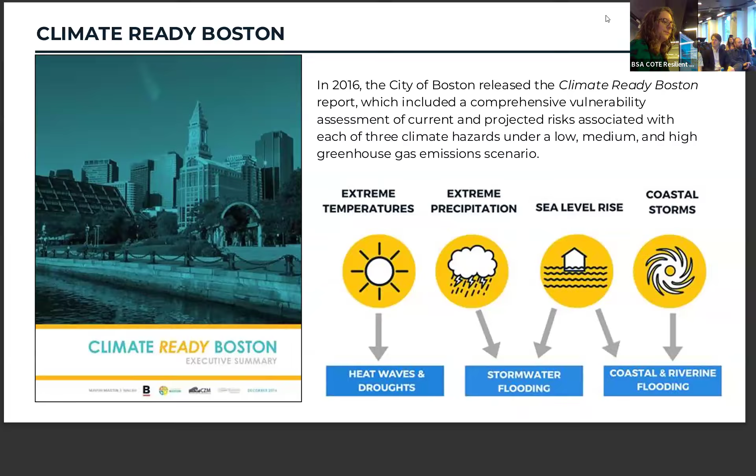This was a comprehensive vulnerability and risk assessment looking at the hazards that our city is most likely to face in the future, being heat, stormwater flooding, and coastal flooding. And my focus today and in general is on the coastal flooding piece. So as we know, we are a coastal city. Over the last 10 years, we've seen more and more nor'easter storms that have hit and caused flooding, also sunny day flooding in king tides. And we know that climate change is only going to exacerbate these areas.

So in the last decade, there have been many, many different resilience planning and policy pieces that the city has worked towards making, and the CFROD is just one of those pieces. But over a 5-year span, the city wrote a comprehensive neighborhood resilience plan for every neighborhood in the 47 miles of coastline. So we have the ideas for our district scale solutions and which flood pathways need to be addressed.

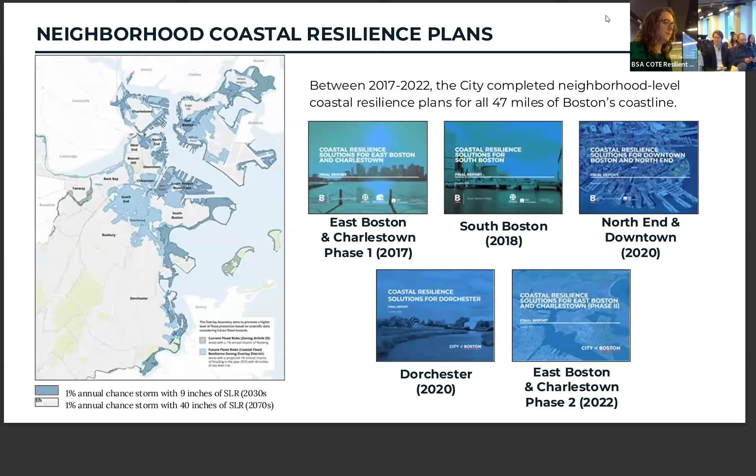And what I'm focusing in on are the adapted building strategies. Because of those neighborhood plans, hopefully these buildings aren't going to see water. But for right now, until we have the billions to build these strategies and the full district scale solution across our 47 miles of coastline, adapted buildings need to be addressed.

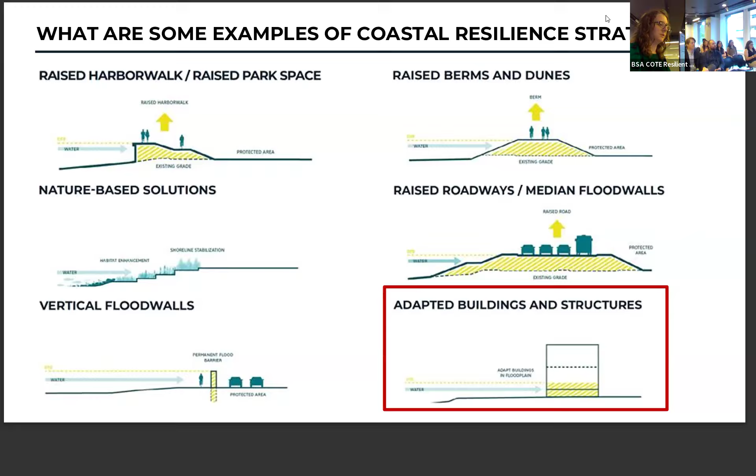And in each of those neighborhoods, we are looking at many, many different ways of providing resilience. We have lots of different options, and it's not always the best fit one scenario for everything. So, looking at raised harbor walks, nature-based solutions, flood walls where we have to, but also doing that belt and suspenders approach of adapting the buildings and structures.

And the 2 pieces to address those building and structures that came out of Climate Ready Boston are zoning to protect our life safety and property, and to create specific resilient definitions within our zoning code, and also a guidelines document to go hand in hand to advise on how buildings in the context of Boston can be made resilient. And I'm going to go through each of those pieces. Excuse me, there we go.

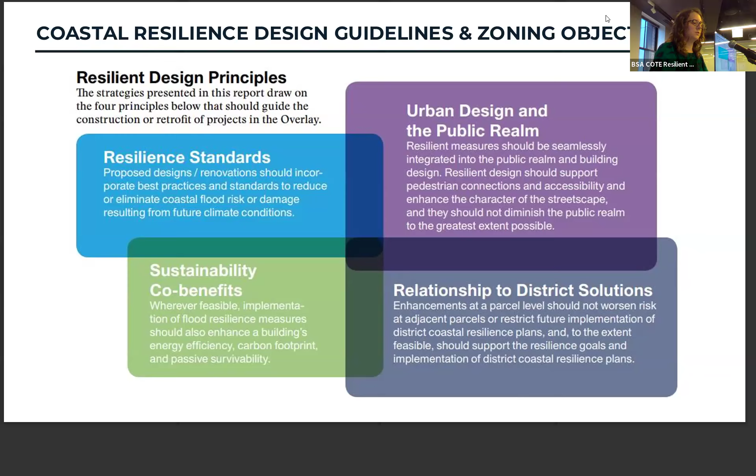And resilience review that came out of the zoning is looking at these 4 pieces hand in hand. We're looking at both the resilience standards in the architecture, sustainability co-benefits, and how to integrate that seamlessly into the public realm. We are changing the shape of the city. Our streetscapes are changing. So how do we talk about design in a meaningful and thoughtful way with all of these pieces? And how can they relate to district scale solutions? Not just looking at a parcel by parcel basis, but where we can tying all of those individual pieces together.

So first I'm going to go into the Coastal Flood Resilience Design Guidelines. So this is a design guideline document that looks at the specific building typologies here in the city at all scales. So from residential to our large commercial buildings. The guidelines document looked at case studies for both new construction and retrofits at each of those scales.

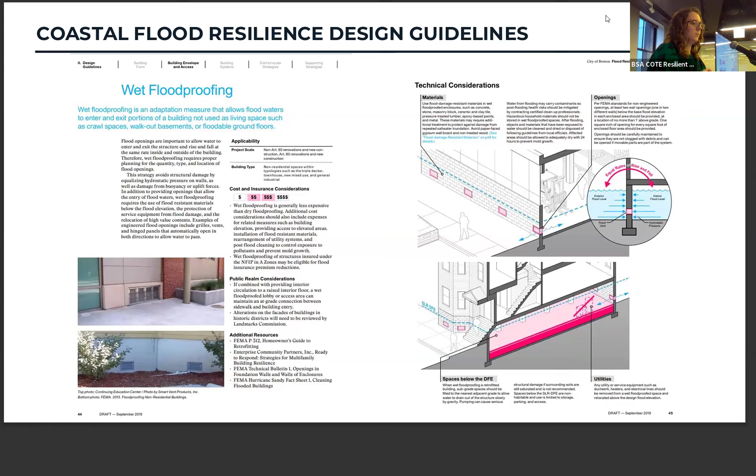And there are many different levels of design that the guidelines talks about. Building forms, building envelope, building systems, and it goes into each strategy that falls under those, looking at the cost considerations, resources, and technical considerations for each one. And there are also case studies of those building typologies that we mentioned. So how to retrofit at each scale to provide resilience and also best guidance for building new.

And there are many different things that you have to start thinking about in your architecture that are outlined in this, like how your circulation changes. When you have design flood elevations that are suddenly 5 feet above your sidewalk, how can you thoughtfully design your circulation? Where should you put it? And this gets you thinking about different ways to do that at each scale.

And then once your building is raised, what do you put under it? Do you do tuck-in parking? Do you elevate and wet flood-proof below, or elevate on fill? So the guidelines document is great in talking through kind of each of those pieces to start thinking about. And those outline the resilient practices that we review in our zoning.

So our zoning is called Article 25A, the Coastal Flood Resilience Overlay District. It's not the most beautiful acronym, but we call it the CFROD. So it's what we got though.

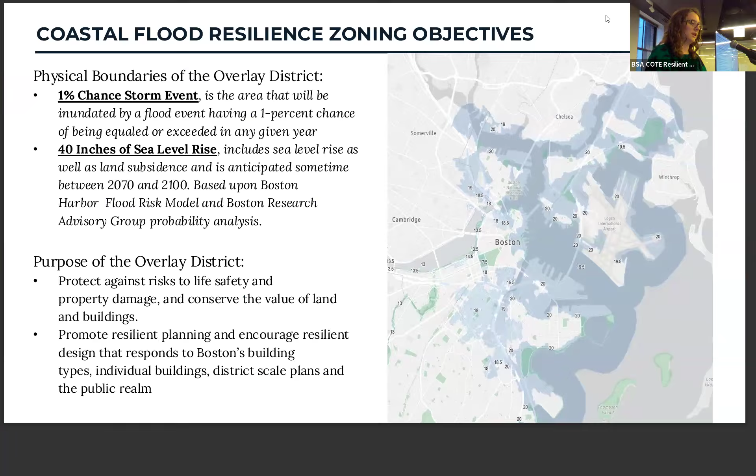The CFROD boundary is a 1% chance storm in 2070 with 40 inches of sea level rise. And that level was kind of a mid-case scenario emission standard as decided by the Boston Research Advisory Group. And it's based off of the Boston Harbor flood risk model. So what we're trying to do here is we're trying to protect against risk to life safety and property damage and promote resilient planning and design.

Every parcel within the city has its own base flood elevation. These are outlined in Boston's zoning maps. You can click parcel by parcel and get the elevation in Boston City Base of your base flood elevation and the level that has to be protected up to. And these heights range anywhere from 13 along the Charles up to 20.5 downtown in East Boston.

But once you start to add in the projected sea level rise, as well as future storm scenarios, you can see exactly how much further into the city this blue that represents the CFROD goes in. So there are many areas that aren't protected by required building code that we require resilience for through our zoning code here.

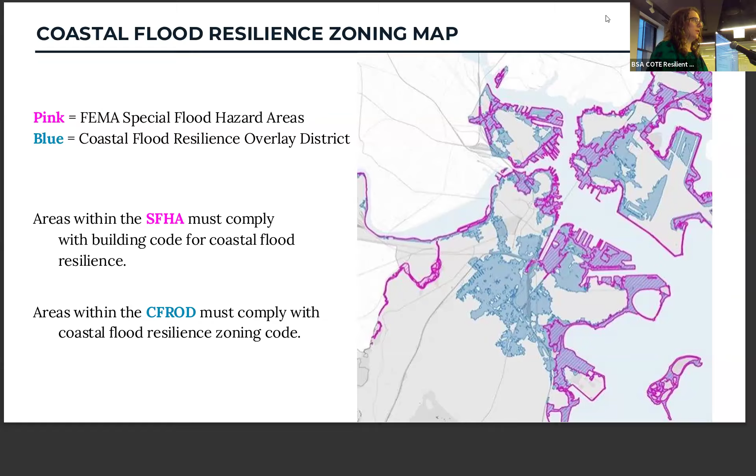What projects have to comply with this? Generally projects 20,000 square feet and up. So that falls within the city's Article 80 bucket. And smaller projects can also elect to comply. But the biggest thing that the zoning outlines is what that design flood elevation is going to be for each parcel. So the design flood elevations are base flood elevation plus freeboard, which is an element of safety.

We don't have a crystal ball. The maps are the best we have, the best science we have, but we still don't know what's going to happen. So we require that element of safety. And that changes based on your project use. So 2 feet is required if you're a residential use or in a FEMA V zone or a high risk structure, but everything else still requires 1 foot above that mapped base flood elevation.

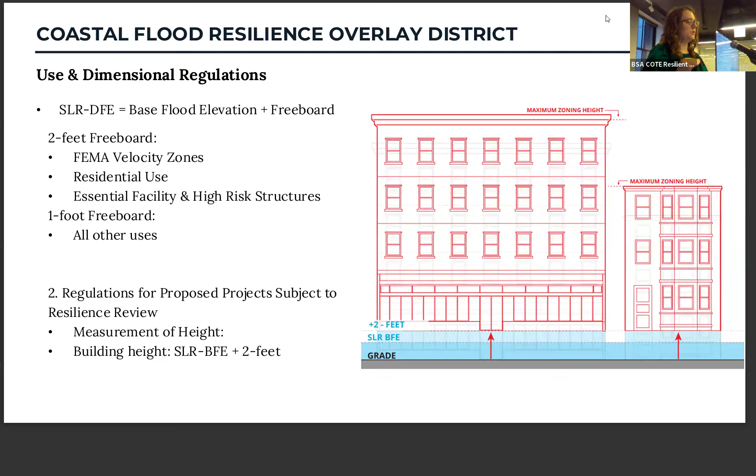And this also changes the zoning height of buildings in this overlay. So your zoning height is now measured from 2 feet above that base flood elevation. And as for residential uses, the design flood elevation for most uses is your protection height. That's the level that you have to provide resilience up to, but residential uses do have to be raised for life safety. So in your residential buildings, you can have parking, access, and storage below, but all residential uses or ancillary residential uses are raised in this area.

So implementation, what does this look like in practice? There we go. The zoning was adopted in 2021, so almost 5 years. We have had projects come through, and so far over 400 projects have been reviewed. We have permitted almost 3.5 million square feet, and construction has been completed on about 250,000 square feet of projects. These metrics are tracked in the new Climate Action Plan implementation dashboard, which tracks a bunch of resilience and sustainable efforts that are going on in the city. So it's fun to see that number go up.

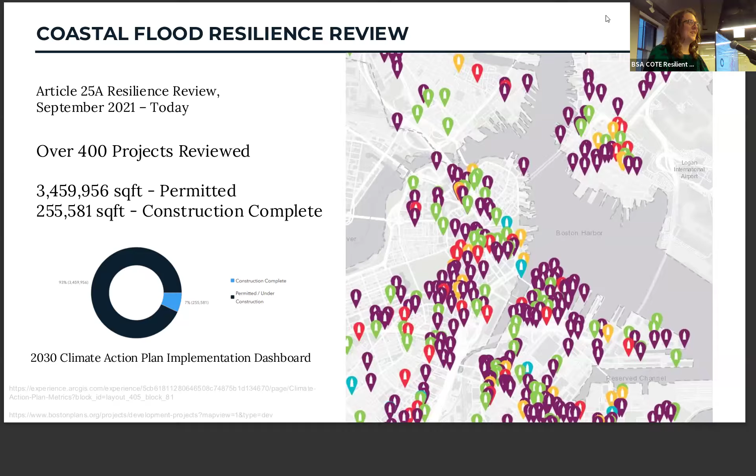We have many waterfront master plans going on in the city right now, and we've seen some very thoughtful ways to have a continuous line of protection up at that DFE all the way across the site. 425 Medford has that continuous line of protection, and they're also committed to raising all buildings above the design flood elevation for that belt and suspenders approach.

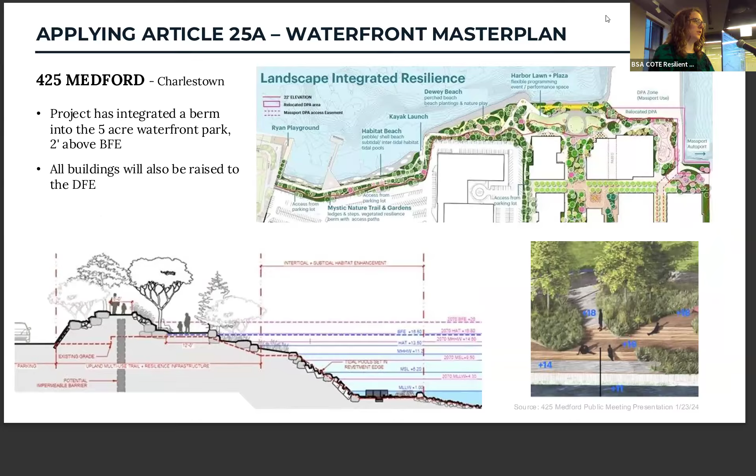Once we get into some mixed-use buildings, we are seeing our public realm and our streetscape change. Normally, these are retail spaces that would be at grade, but they're being raised for resilience. So how do you have zero lot line projects that are raising? How do you still have a nice streetscape, buffer those edges? And what's the best design outcome?

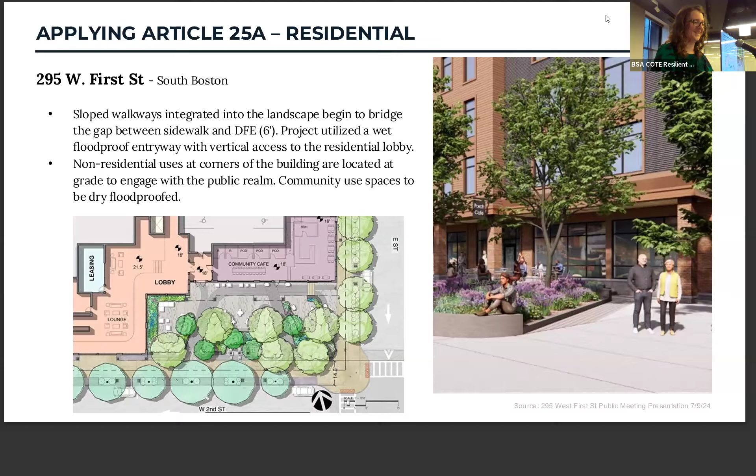And in some areas of the city, the DFE can be higher than 6 feet. So we are seeing residential that create sacrificial ground floors. All of the residential uses are raised. They're measuring that height from almost a floor up, and the ground floor becomes sacrificial parking, access, and storage in order to keep those residents high and dry.

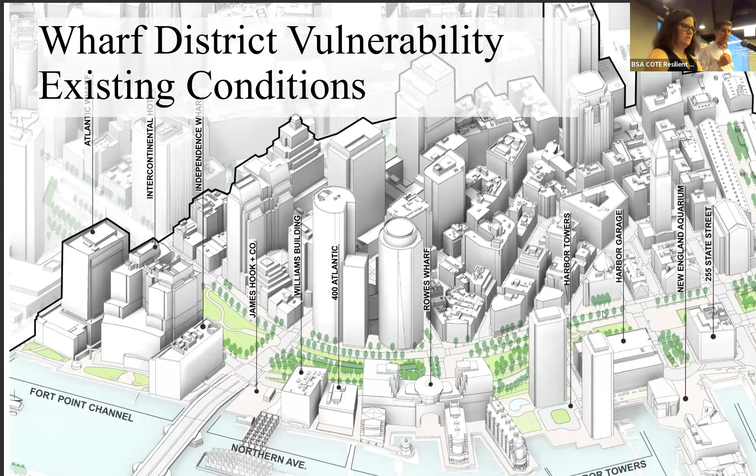This is nice. Yeah, we're kind of zoomed in here. I'm just wondering if we can zoom out a little bit there, but generally, if that's not working, we can, yeah, there we go. Perfect. Well, yeah, it's kind of zoomed in a little. That's interesting. Technical difficulties. Sorry, I just zoom fit screen. So enter PDF full screen. Sorry, I don't know why. I think that's going to be fine. Is that okay? I apologize. That's fine. Nah, we're good. We're good. We have to be resilient in all things.

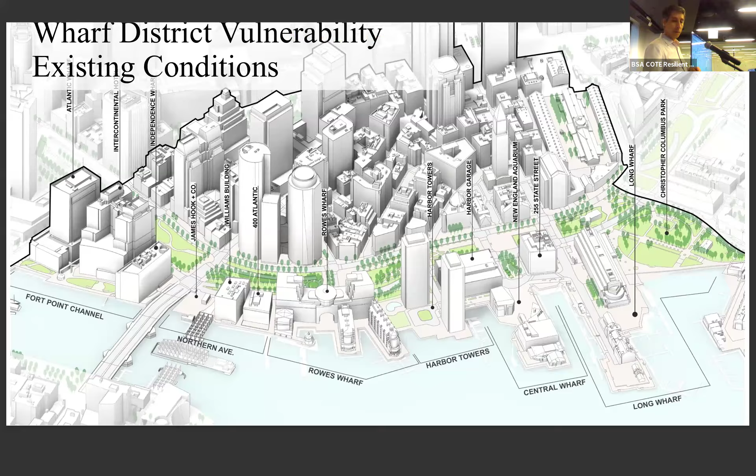So this is the Wharf District. It extends from the Fort Point Channel over at the left side of the screen all the way over to Christopher Columbus Park at the right side, all along the waterfront of downtown Boston. That's what it looks like today. And what we are trying to help the community protect against is this. This is a 100-year flood, not in 2070, like we often like to talk about, but in 2030. So if you remember Winter Storm Grayson from 2018 that flooded out MBTA's Aquarium Station, flooded up State Street, that's that storm happening in 2030.

Similar for the North End. So here we're now just moving just north. On the previous map, we've got Christopher Columbus Park over there on the right side of the screen, all the way up to Battery and Burroughs over by the U.S. Coast Guard. Similar flood hazards here with that same 2030 100-year storm.

So we've been working with both these communities, working with the Wharf District Council in the Wharf District, working with the North End Waterfront Climate Alliance in the North End. Both are nonprofit organizations who are working to help improve the quality of life in their community. So these are volunteers who are just trying to do their best for their community and have been for quite some time. So they came together and said, look, we want to have a community-led resiliency plan to help give our residents, our business owners, the people who work, live, and play here a voice in what climate resilience means to them as a community.

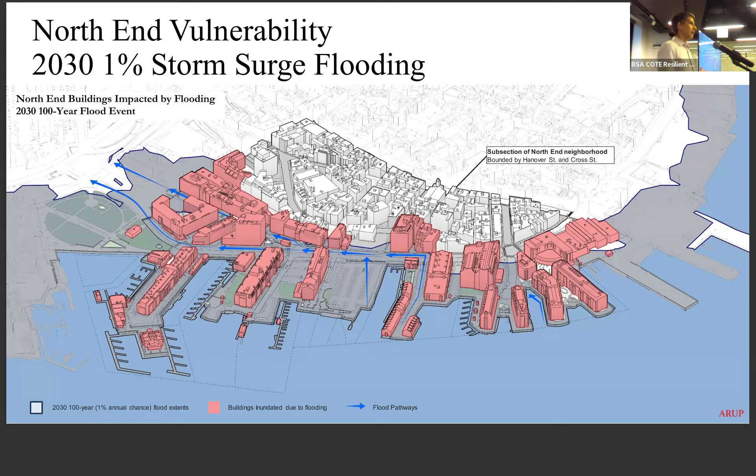So I'm not going to go into a whole lot of detail on what the plans are, because I really want to get into how we've used some of the tools that Amber talked about, how those were really important for us as designers to be aware of and to integrate. I want to talk about the stakeholder engagement framework that we use to build unanimous consensus with property owners on these projects, and some of the lessons learned.

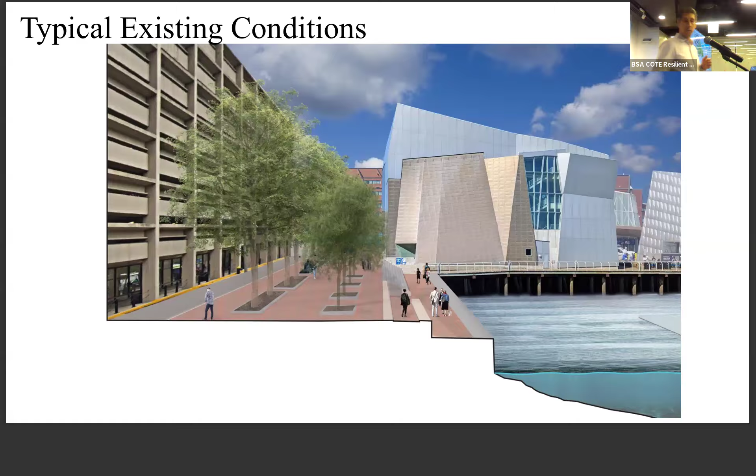So today, we come along to the water and we step down on the harbor walk to get close to the water. And what we're proposing to do with our plans is flip that, so we will step up in the future to come up over this elevated landform that has a flood wall buried in it. What we're trying to avoid is a 6-foot tall wall that cuts off access to the waterfront, destroys what we know and love about the waterfront, providing an accessible walkway up and over the top and back down again, new seating and steps down to the water, and using this as an opportunity to incorporate the living shoreline you see there, as well as additional vegetation to really make this a world-class waterfront and not just a flood wall. So that's generally what we're looking to do throughout these areas.

So with that, touching on the tools that we use to get there, because at the end of the day, we were successful in building support with 100% of the waterfront property owners, public and private, in both neighborhoods, as well as building support with the city and the Army Corps. So how we got there was the great work that the city has already done to lay the groundwork here and facilitate communities to come and take this next step.

So I'm not going to go into great detail because Amber did a great job, but some of the things that we found really useful in Climate Ready Boston, there was great documentation of the public engagement that the city had worked on for years to identify the priorities, preferences, and the criteria the community had voiced and said, these are the things that we want people to consider when we choose between options for resiliency. So having that documented was fantastic so that we could build on that rather than have more meetings and burn people out with meetings and meetings.

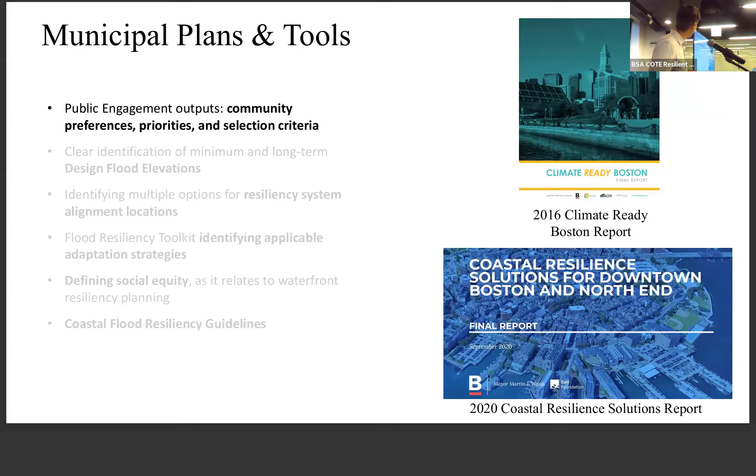Those are two different elevations, just so you don't get confused. Climate Ready Boston is more about the neighborhood scale, which is what we were really using for North End and Wharf District, but we're also working with buildings that need a second line of protection, and that's the zoning viewer. But having those elevations saved, I can't tell you how much time and effort as we're working with communities to establish what needs to happen to protect them. Identifying the locations where flood protection systems could be placed was immensely valuable as a first pass with Climate Ready Boston.

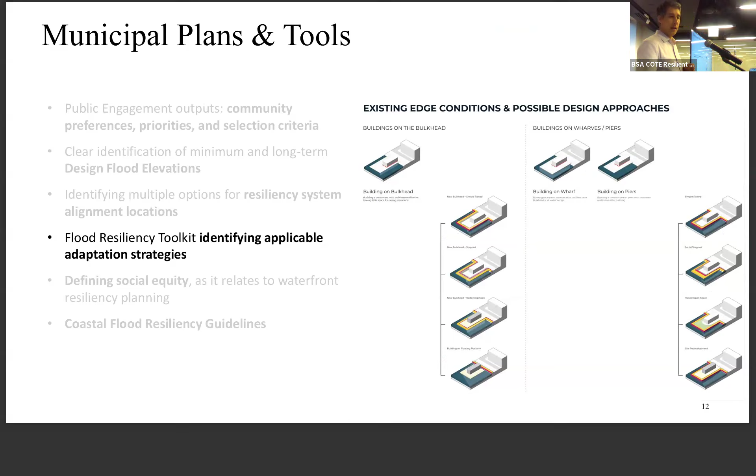Preparing a series of toolkits. This one I think was from downtown and North End with different strategies for flood protection that could be applied to those alignment locations. Already having those vetted by the city as what was appropriate for these locations was really helpful.

Of course, there's a lot of conversation and engagement that comes into this, but the infrastructure really plays into equitable access to the waterfront, making sure that we've got safe transportation to, through, and around our neighborhoods, and providing ecosystem health within our plans. So that was really helpful to build consensus around what we were trying to achieve in our work.

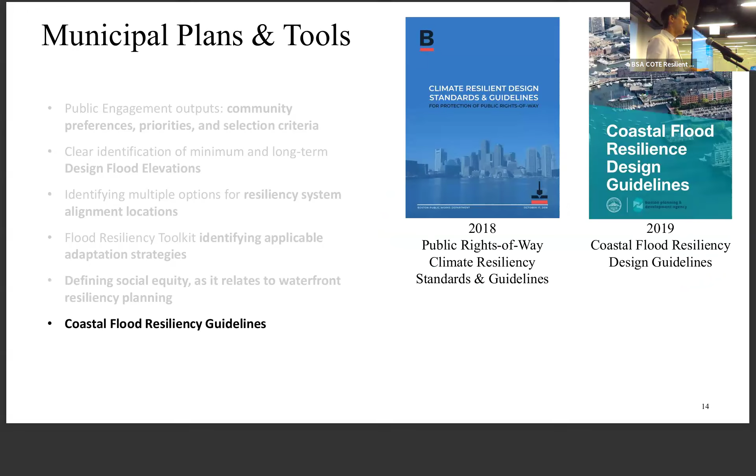And then finally, of course, the various flood resiliency guidelines the city has put out to make sure that we're providing the same level of protection in the same ways throughout the city. So fantastic tools. Could not have done the work that we did without the city of Boston laying the groundwork for this.

Now, I'm going to change gears a little bit here and talk about the framework that we use to set up these projects and deliver them. This stakeholder group, this public-private partnership, was put together by the Wharf District Council. The Wharf District Council had been around for a while as a group of residents and business owners. They wanted to really start building a coalition of support from day one, because they always knew that they don't have the money or the people or the will, quite honestly, to take the design to 100% and build it, nor do they have the authority to do so. So this was one step in the process. So really crucial was building a coalition of support to take it on to the next step.

So they formed in partnership with public agencies, city departments, state representatives, they brought some private sector consultants in as advisors, and other nonprofit organizations that do represent the interests of various communities and groups within the city, as well as the property owners and marina dock operators. So brought all these folks in as part of the project.

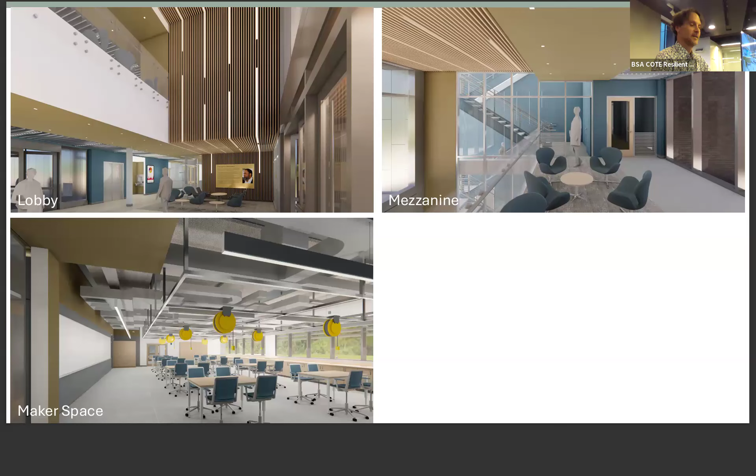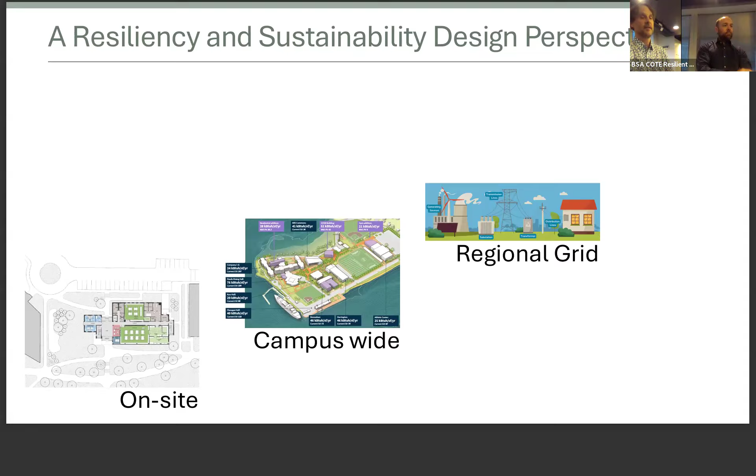So resiliency and sustainability really guided the design from the very beginning. DCAMM and the school were very much committed to making this a showcase building for a low EUI and resiliency. And because they're living on a floodplain, you can appreciate that aspect of it. So for us, we were always looking at it through the lens of the site itself, how the building was going to relate to the entire campus and its viability, understanding the relationship of the building to the overall grid, the local grid, and being able to survive for some time without it. And then consideration for the climate as good stewards through the design and construction process.

So part of the approach to resiliency is pretty fundamental. First of all, you want to design robust because you want it to last. There's no sense in spending lots of money and embodied carbon and energy on stuff that you have to replace. So we really think of it as a 75 to 100-year building. The other thing was to appreciate the freeboard above the floodplain level that was predicted for the 100-year storm in 2070. So we are raising this building slightly beyond the flood level.

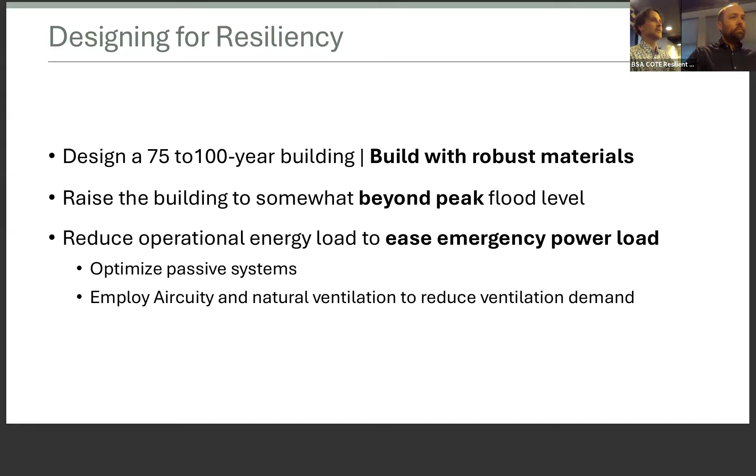The other thing is to be sure that we could run this building for at least 48 hours after a blackout. We wanted to lower the overall energy requirements for the building on a daily basis so that you wouldn't have to have lots of generators running to get you through those 48 hours. So we emphasized passive systems and approaches, particularly for the building envelope. And because this building has a relatively large number of fume hoods compared to its size, we wanted to control the amount of once-through air, so we used Aircuity systems to monitor airflow and reduce it when the hoods aren't in use.

So this is an overview of some of the sustainability and resiliency pieces that went into this building. First of all, we've got a pretty amazing EUI of only 52 kBTU per square foot per year. And in so doing, we're at 45% of the ASHRAE 90.1 2010 standard. This building started getting designed almost 4 years ago, so we were working with older standards. But we also had to adhere to the Massachusetts Executive Order 594, and we managed to be 43% better than that.

So what are some of the things that we did? Well, one of them that we had a huge advantage is the school itself is installing a ground-sourced thermal heat pump system. So we have this campus loop that we are tied into, and actually the primary mechanical equipment that distributes the geotransfer heat is located in this building.

So the other thing we did too is that we actually raised the whole building 6 feet above the lowest level of the site. The site was between 12 and 13 feet, and we're raising it over 6 feet. So that's a pretty significant amount of earth moving that we did. We also obviously are trying to reduce energy usage, and so we have an enthalpy wheel for energy recovery. As I already mentioned, we've got an Aircuity system in it to handle the indoor air circulation. It changes the amount of air delivered based on what it senses within the building.

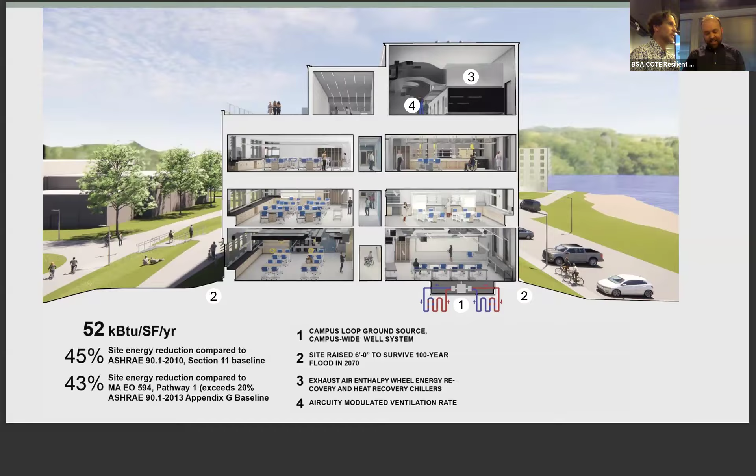So the difference is when the hoods are not being used, the air is moving at 2 air changes per hour, and then when they are being used, it pumps up to 4. And then we also have the domestic hot water that's connected to the geo loop, so we're preheating all the water before it actually has to get heated up to the temperature for hot water.

We were able to get very low U value for our windows, and there's an interesting story on that too that's coming up. And we were able to do similar for our walls, so you'll see a very nice wall section coming up that shows how well insulated we managed to do that. So this is all really important fundamental homework that doesn't show up in a fancy design on the exterior of the building. Yeah, exactly. But is extremely useful to the upcoming information. Yeah, that's the stealthy part of the building.

And then we also were reducing energy costs by doing daylight dimming throughout the building. And also we have a much lower LPD, of only 0.6 watts per square foot instead of the typical 0.99. So what are the design drivers? First it's the executive order from the state, then it's high winds, and it's sea level rise and potential flood conditions, and then being good climate stewards.

So the executive order is basically, almost all of you are familiar with it, a great way to get fossil fuels out of your life. We do actually have a backup boiler in the building for emergency, and we are managing to meet LEED Silver. So before you go on, it's the state making sure that state projects lead the way in sustainability. So since this is a state school, this is a key project to do that.

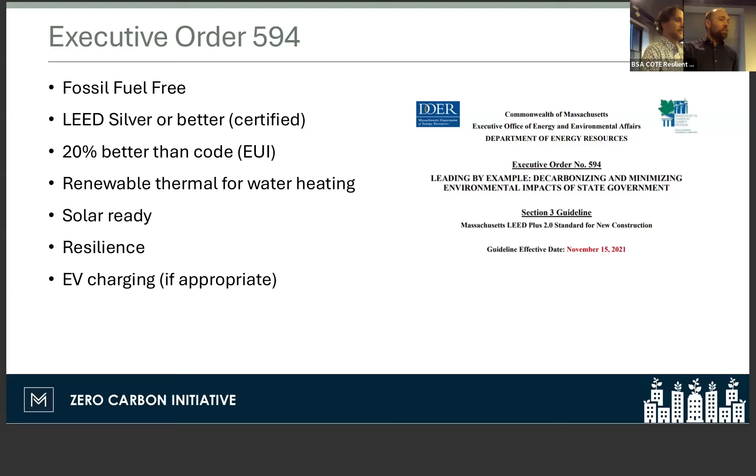Yeah. And at the time, the International Energy Conservation Code for 2021 was our requirement, but DCAMM was really insistent that we should opt for the Mass Stretch Code for 2023. So that is what we designed to, and so it's very high performance building design, and you can see in the highlighted text there the various things that we're doing here. It's not passive house in terms of envelope air tightness, but it's pretty close. It's a lab. And it's all about DOAS systems, enthalpy wheels, and then we were able to get our site energy down too considerably.

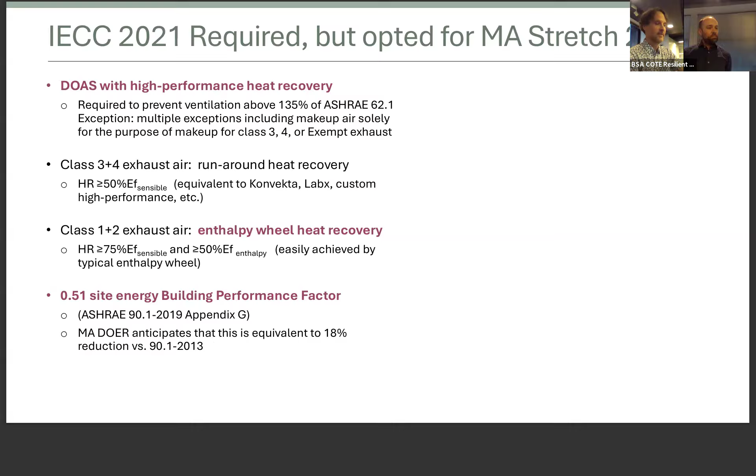So some of the resiliency goals that the school needed to think about at the very beginning was: are we going to do good, better, or best for things like surge and precipitation? How are we going to deal with wind and seismic? And through a whole balancing act of cost and practicality, they opted for the good approach. So what this really has a lot to do with is making sure that we had all of our mechanical and electrical equipment raised up above the floodplain. So we have an electrical room that's at 18 feet and everything else is up in the penthouse. We have good code compliant glazing and obviously we're meeting the seismic code.

It's interesting that what we did was just good. Yeah, on those respects. So wind hazard, let's talk about that.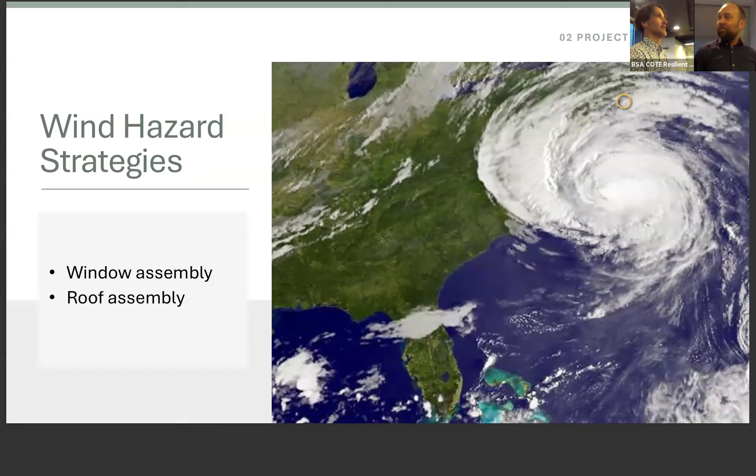So really for us, the windows and the roof assembly, but particularly the windows, were the hot spot. And one of the things about the area right here, and you can see in the yellow circle, the peninsula in Buzzards Bay that the building is located on, was that we actually had a wind speed of 139 miles per hour, so there's a risk category 2 here for hurricanes. And it also would have airborne debris, so there's the issue of missile protection. The wind direction is pretty straightforward. It's generally coming from the west, just like the Earth spins.

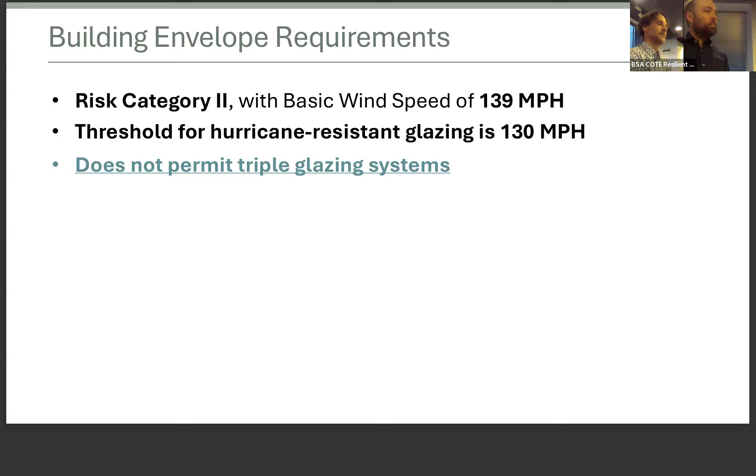So here's the deal. So the building requirements, we have to meet these categories. And the thing that is really depressing is that when you're at 139 miles per hour, you can't use triple glazing. There are not available systems. Yet. And so this was a big disappointment for DCAMM and also for us, because what that meant was that we were going to have to use double glazing.

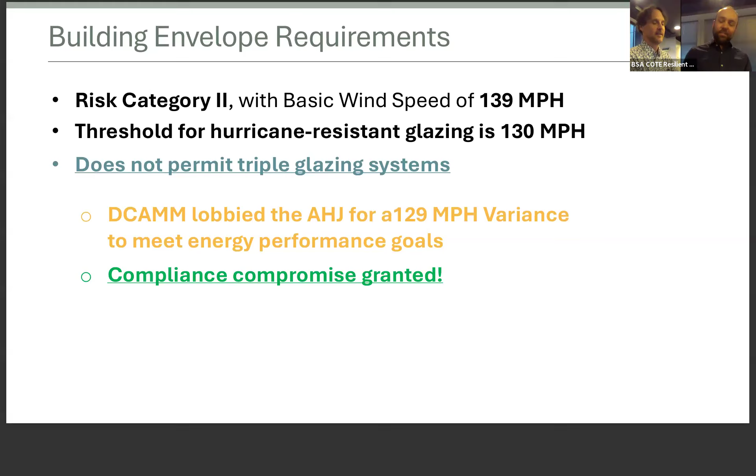And DCAMM basically lobbied the AHJ, and we were able to get him to say, all right, the risk factor is actually going to be 129 miles per hour for this area. And so that means you can use triple glazing. Compliance granted. So energy trumped a little bit of safety factor. And it was right on the edge. It's important to note that. Yeah. So for us, what was exciting is, we're going from a U value of 0.42 to 0.23, and that's an exciting change.

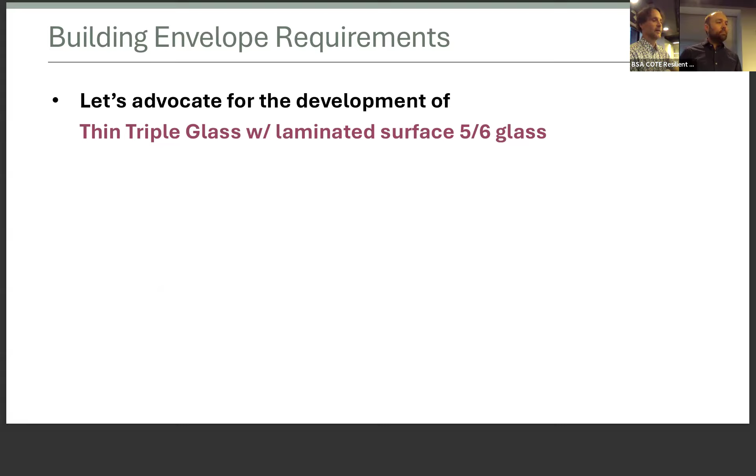That's great, but what would be really nice is for all of us to try and advocate the window companies to work on a triple glazed window system that would work and have a laminated glass at the 5/6 glass. So there is stuff happening though, because there is now thin glass triple glazing that's starting to happen. They can fit into a 1 1/4 inch wide mullion pocket. So we think that this might end up being something that will become reality, and all of us can work hard to convince various glass manufacturers to move in this direction.

So this isn't just academic. We're doing another project at the University of Rhode Island right now that is suffering from this exact same thing. And there we actually ended up having to go from the triple glaze down to double glazed. It has a little bit higher wind speed.

So the other thing we were doing too is making sure we've got a roof assembly that's not going to blow off. And what's important here actually is the lower detail that you're seeing there is just making the point that the first layer of insulation, which is not tapered, needs to be glued and mechanically fastened, and that it's only the tapered portion that gets adhered with mastic.

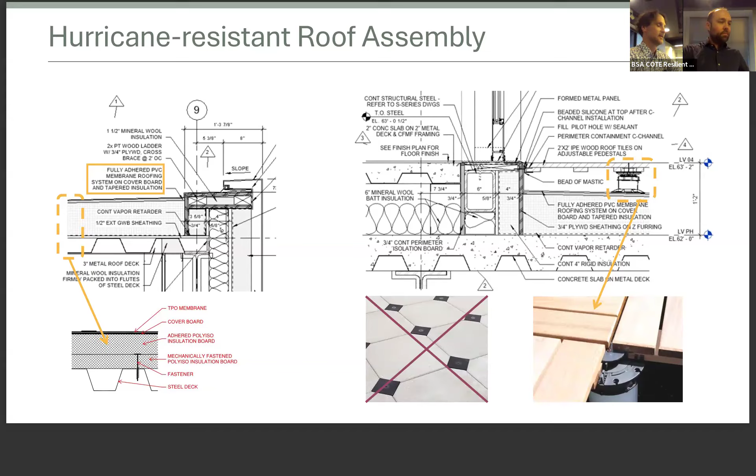And then the other part that was important is there's a walkout deck now. And for a while, they thought they were going to use concrete pavers, but you probably know that these bison systems have a plate that goes on top of the corners of the paving to hold them down for hurricane winds. And they found that extremely unsightly and horrible. So what we ended up going with instead is Ipe decking, and those have a kerf cut below the decking that prevents the hurricane uplift. So we went from what's on the left to what's on the right.

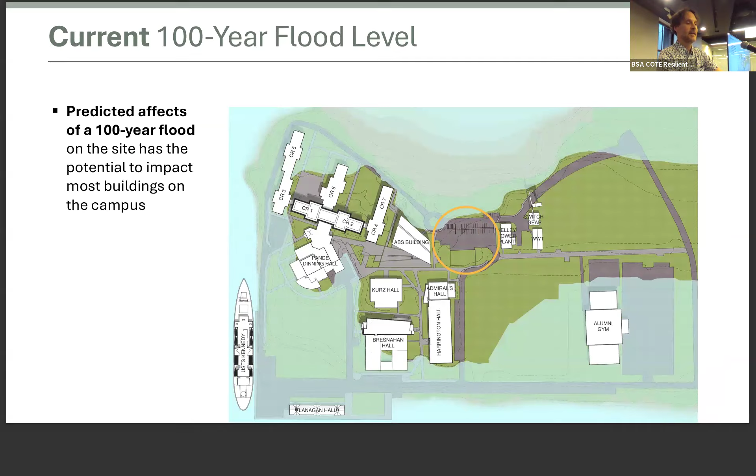Okay, so let's talk about sea level rise. Obviously you guys are aware of the fact that we're in a big flood zone, and so is our site. And the closer you get to it, you can see the projected sea level rise here, but what sucks is when you get a 100-year storm and the flood level for today. And then what happens in 2070? Well, it's a lot worse. In fact, there's only one little piece of high ground left on the entire site. And our building, if it were not raised, would definitely be inundated.

So before we actually got this job, Sasaki did a masterful job on an overall campus master plan and a site proposal for this particular building. And at the time, they were recommending what was going to turn into a 5'6" freeboard, but it was to raise the building to 17'6".

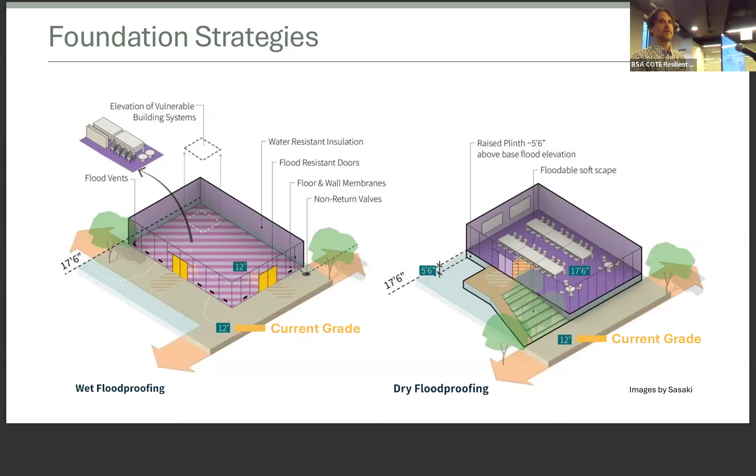So what this slide is basically showing is, do you just sort of do wet flood proofing, or do you do dry flood proofing? The school was definitely adamant they wanted to do dry, and so when we chose to do that, they were also more conservative about how high they wanted the building, how much freeboard they wanted. So we elected to go up 6 feet instead of 5'6", and so now the building's first floor is at 18 feet. And one of the crucial things was making sure that the electrical systems, which is that yellow segment there, are all at 18. Even higher. Yep.

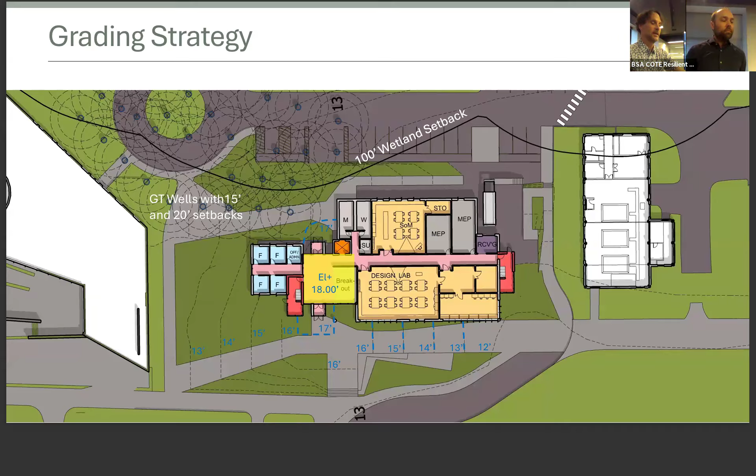And so what you can see here is how we had to regrade it. And a lot of the challenge to go up 6 feet on the west side versus 5 feet on the east is that we also needed to make this fully accessible, and we didn't want any ramps. We wanted nothing more than a 1 in 20 slope. And our landscape architects, Traverse Landscape, did a terrific job with that.

So let's just give you a little campus context. So the buildings on campus right now are all of these you see, and I realize we have to move really fast. Yes. All of them basically are 13 feet above sea level, and right now, the base flood elevation ranges from 10 to 15 feet, so almost all these buildings get inundated. And for the 2070, it's way worse, from 13 to 17 feet.

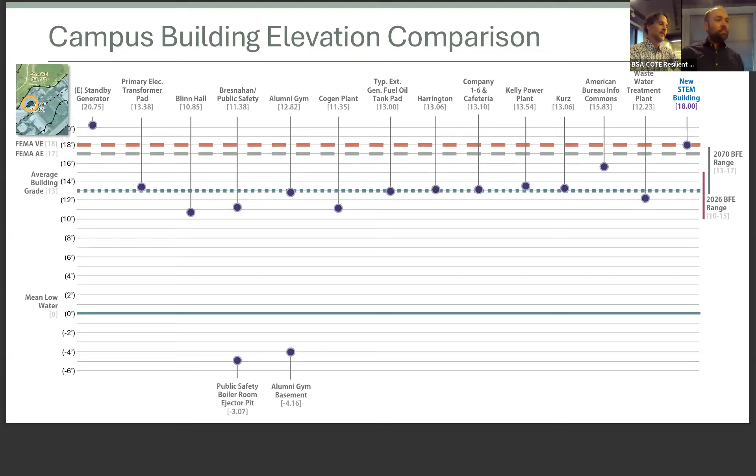The school definitely elected to design for the 17-foot level. And by the way, the FEMA flood level, the AE flood level, is at 17. So we built a building at 18 feet above there. But they'll be struggling with what to do with the rest of the buildings over the next quite a few years to raise them up or retrofit them or whatever. Luckily, the high velocity zone is further north away from the site, so we don't have to worry about that.

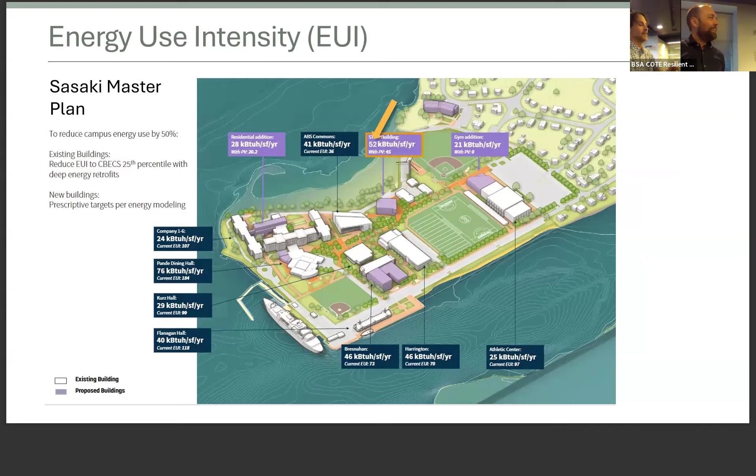There's the geothermal loop. The building was projected to be 52 kBTUs per square foot per year, and we got it at 52, so that's pretty good. And Sasaki thought it was going to be rotated 45 degrees to align with north, and we actually managed to do it with the building not rotated, so that was pretty cool. At the campus's preference. Yeah. It made a lot of sense for a whole ton of reasons.

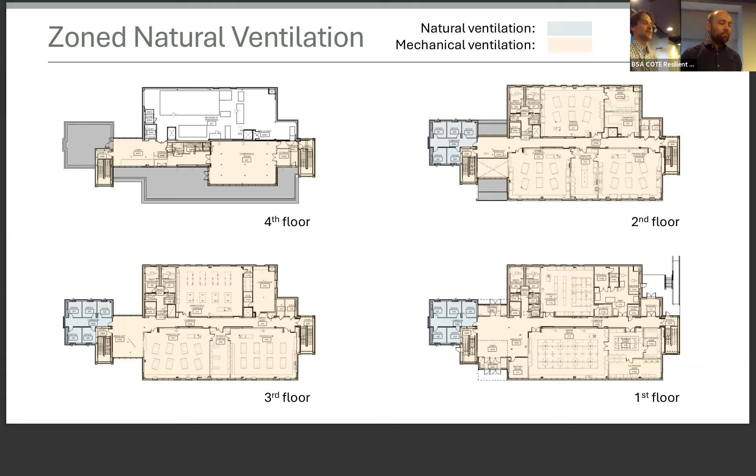We made a very, very strong effort to keep our window wall ratio down as low as possible. And so we actually managed to get only 20%, but we still got a lot of nice light and views that are accessible to all. Really these rooms are daylit, view-oriented teaching spaces. Yeah, and that saves a ton of money and energy.

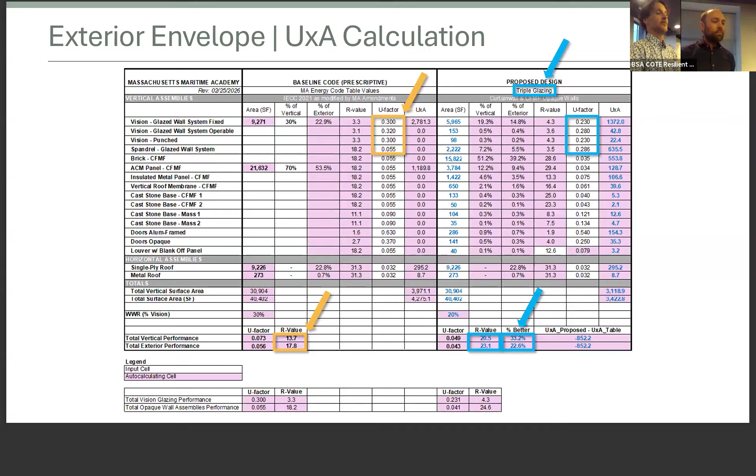So when you compare the baseline to what we did, the baseline U factor was 0.3. We were able to go to 0.23 because we got that variance, which was really exciting. And if it wasn't a lab, it would have lower energy. Yeah, it would definitely.

And so the other thing was just reducing the embodied carbon. The areas we were able to make a difference were really in the concrete spec and the steel spec. The thing that's interesting about the steel is that we went from W shapes to tubes. And by doing that, we were able to reduce the steel weight but still have the right strength, so we had less embodied carbon as a result.

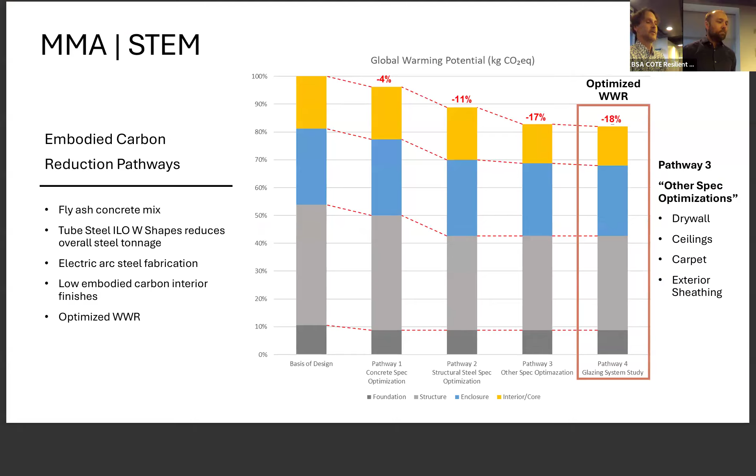We paid an awful lot of attention to windows for reducing embodied carbon. So that reduced, optimized window wall ratio was a big deal. And then some of it is sort of the last percentage of carbon savings that we got out of the windows.

And then lastly, for the resilient benefit of human health, wellness played a really important part in the design of the building. And part of it was inspired by COVID, frankly. Because we want a building that can also survive the next pandemic, it has benefits like MERV 14 filtration. So, all right, there you go.

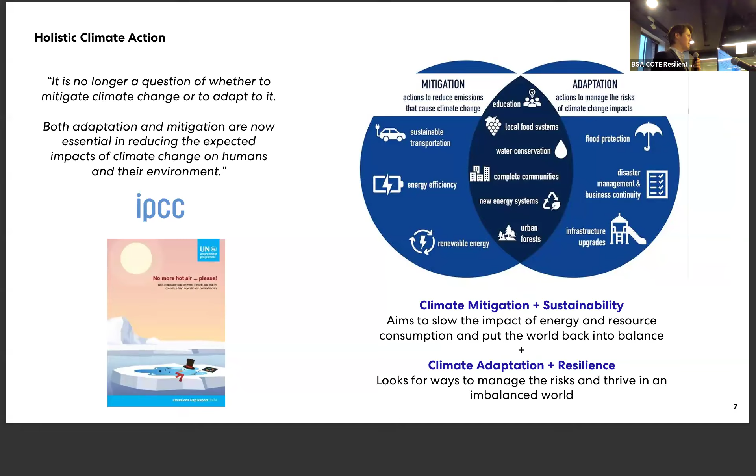For the context, again, this is New York, right? Sandy was pretty fresh in the minds of a lot of people, and this is Columbia University in New York. So folks have already talked about this. Mitigation is important, but adaptation is critical going forward. That's the message here. We have to think about resilience as preparing to adapt and endure and thrive within the context of our environment.

A couple things specifically about resilient design and the ways to design our buildings and our places to be resilient in terms of goal setting. So in this case, we were on number 3, right? We wanted to be able to not just maintain life safety, but be able to bounce back. But this was an athletic facility, so it didn't need to have continuous operation. It's right on the water. If there's a huge storm event, nobody's playing tennis. But they want to be able to play tennis shortly after. So that's the context of what we're dealing with.

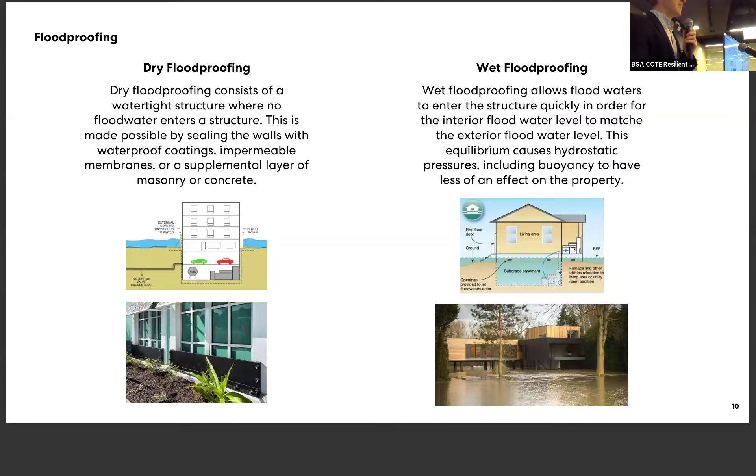A reminder on dry floodproofing and wet floodproofing, that's already been covered by a few folks tonight. Dry floodproofing is keeping all the water out. A lot of work and effort and cost and materials in order to do that. And I think we probably all know it usually still doesn't work, or it is a lot of maintenance to make sure it keeps working. Wet floodproofing is letting the water in.

So, for the context of this project, this is a tennis center for Columbia University. Their athletic campus is on the very northern tip of Manhattan. They have their primary campus, which is down here on Morningside, then they have 2 other campuses, and then they have the Baker Athletic Complex, very northern tip of Manhattan. If you've ever driven into Manhattan on the Henry Hudson Parkway, you come over that bridge, you can see down to the football field. If you've ever taken Metro North in, you go by the site right there.

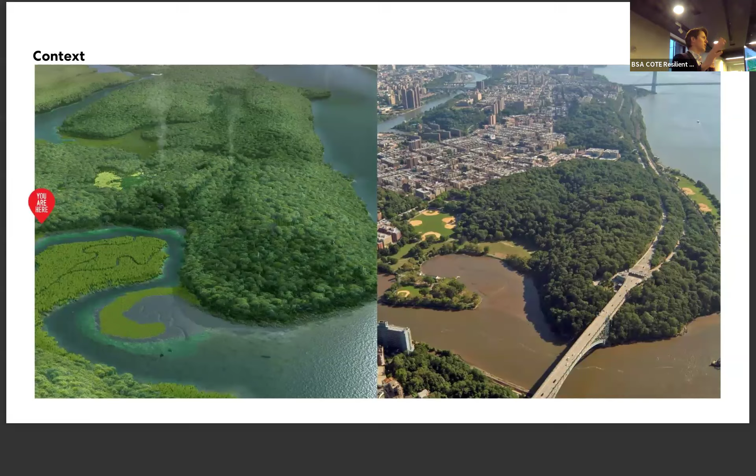This is what it looks like, that bridge on the right, and what it actually used to look like, right? This is Inwood Park, and it's one of the only places left in New York that's quite close to what it was a long, long time ago. So that's some of the context that we had to work with. This was what it was when we got there. Existing 6-court tennis facility, air-supported structure, so a bubble. So if you went to go play tennis here, you would have no idea that you're in this amazing place,

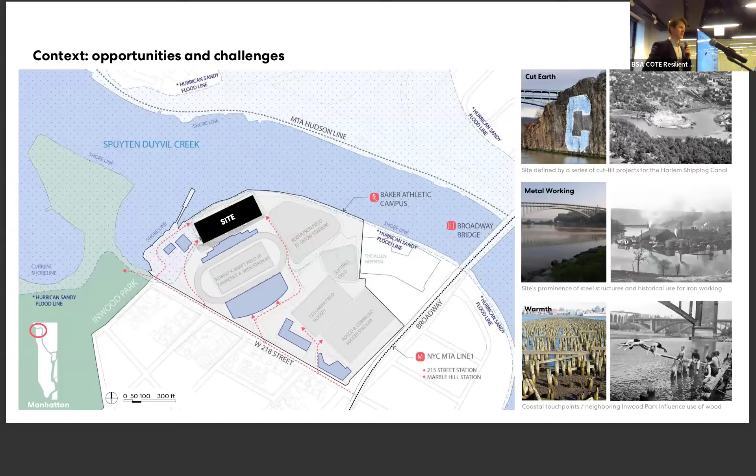right on the waterfront. And so thinking about that opportunity and the challenge of this project, we wanted to take advantage of this site. It's a pretty amazing site. And there actually aren't a ton of sites in New York that are that close to the water. I grew up in New York, and it's surrounded by roads, and you don't have as much connection to water as you might think, as we do here in Boston. So this was a great opportunity to take advantage of that.

And from the very beginning, goal setting was critical. Engaging with the waterfront, but also, remember, people were very fresh in their minds about Sandy. And so we did a study first, where we evaluated from another bubble all the way up to a new building, full construction with rooftop tennis courts.

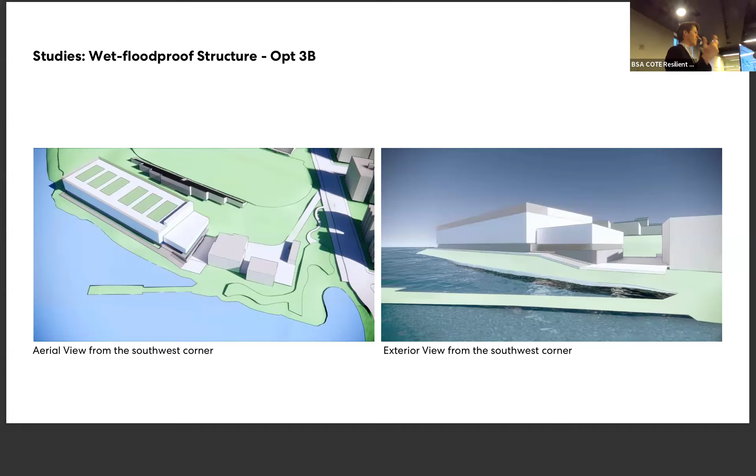And it really came down to 2 options. This was option 4, which is elevating the whole building way above potential flood levels. And the other option was to build it on grade and have a dry flood-proof ground floor. And we did an analysis, and option 3, on grade, traditional, with concrete walls, dry floodproofing, won. It was just a lot less expensive.

You can see almost a $10 million delta between building it on the ground and building it way up in the air. So that's where we started the project after doing the study. Reminder, Sandy did not actually flood this site, but it was close. And another reminder, the current FEMA FIRM flood insurance rate map tells us that this isn't going to flood. And even the preliminary FIRM for the future, it's not going to flood.

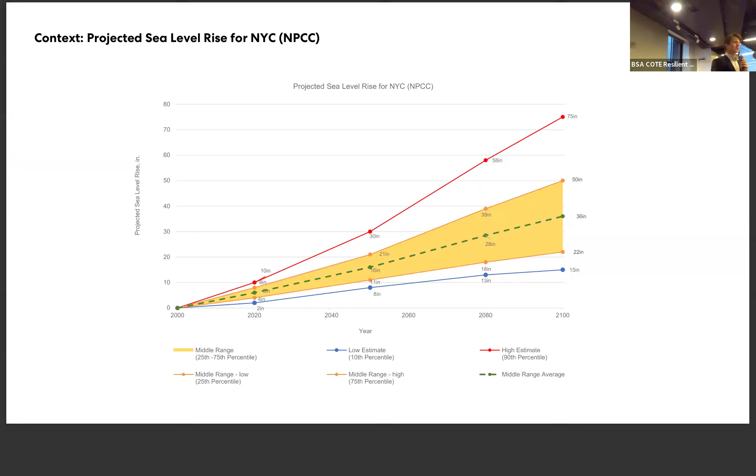So this is all sort of looking backwards, right? So we actually weren't required to do any of the things we did by code or requirements from the city. But if you do look at the projection for sea level rise and you do look at those risks, then you can realize that the project is at risk. It's not at risk for the 1% storm, but it is at risk for the 0.2% storm.

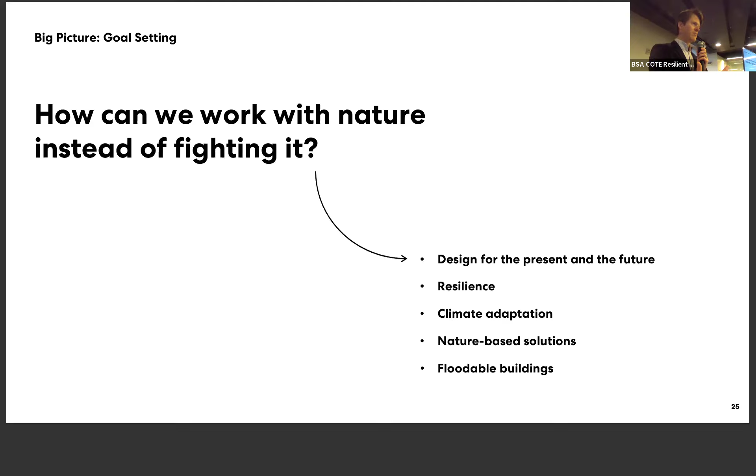And I had to leave out the other aspects of this presentation on light and air because of time constraints, but that was a big part of it as well.

Just a few diagrams here to show the idea for the project. You can see that bubble, the basic massing, the relationship of the athletic volume to the support volume, the idea of bringing the landscape in, and, side note, this extends the pathway that surrounds Manhattan a little bit further. It used to stop here, right? You could go all the way up the Upper West Side, and we extended it a little bit further, so that's nice to extend that publicly accessible pathway.

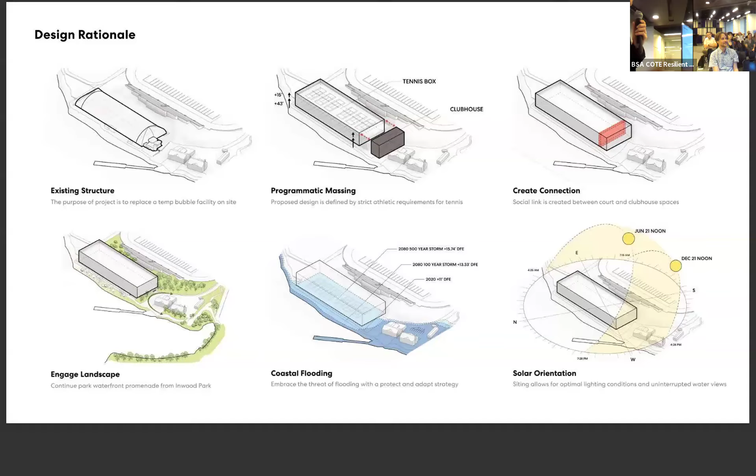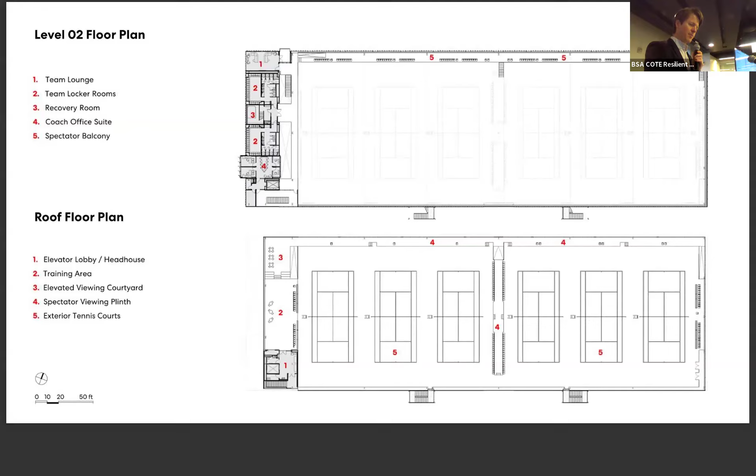This is just a floor plan that shows those 6 courts, the associated support spaces on the end with spectator seating. And then on the upper level, there's a balcony that overlooks the courts. So mentioning again how we used those design flood elevations that others have talked about here to help us decide how to approach the project and what to design for. And so this is really it right here.

At a certain point, we were kind of tiptoeing around this idea of raising certain parts of the program, and I had this moment where I was pitching to our internal team the kinds of things that I teach about, and saying, what if we actually just let the whole first floor flood? And I was a little nervous because I thought it was kind of a wild idea. And it was the first time that we really crystallized the design, because it became the defining characteristic for the project and allowed us to rally everything around that.

And amazingly, when we presented to the clients, they didn't even bat an eye. They were like, well, that's brilliant, and our risk people love it. So great, go forward. And we never had to worry after that. I thought that they would hate the idea.

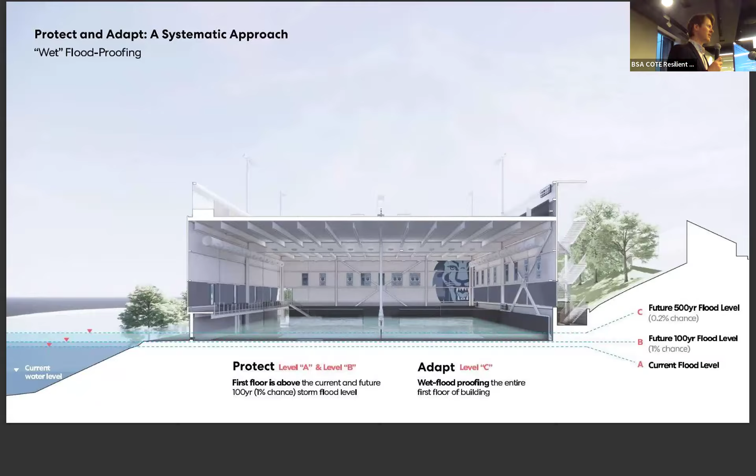So the basic approach is design an entire first floor to be able to flood. So it's hardcourt tennis courts, it's locker rooms that have CMU walls, it's polished concrete floors, right? And it's integrated flood vents. And so those flood vents surround the entire 3 sides of the building that isn't against the hill. And we integrated those flood vents to let the water in and out in the case of a huge storm.

So after a big storm, the water can come back out, you've got to bring a cleanup crew in, but you're back in business in a matter of days. Maybe you have to replace the area rug at the lobby.

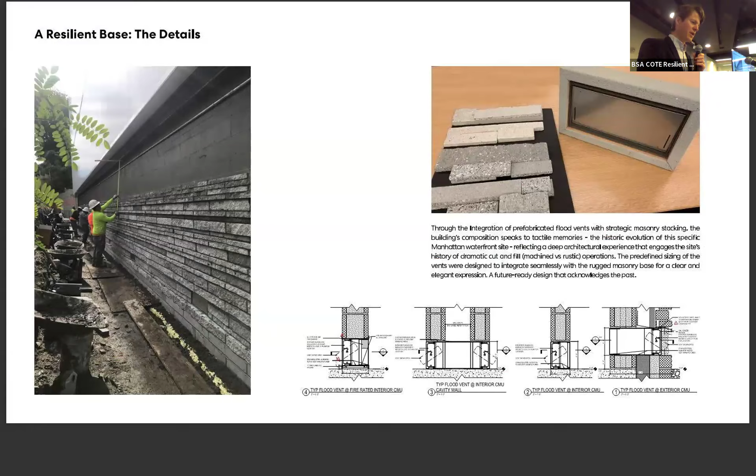Some of the details, so very standard flood vent products. I think that we saw that in the guidelines for Boston as a strategy, simple products integrated here thoughtfully into the coursing of the masonry at the base of the building. We figured out how to use a flangeless option and integrate that into the way that the corbelling of the masonry units were detailed, to really celebrate the fact that we're letting the water in.

And so what that resulted in is a building that is connected to the waterfront. So we have, instead of a concrete, dry-proofed bathtub, we have a building that when you go there and you watch a tennis match, you know that you're in this special place. And you can see the water and you can hear the water or the birds or the breezes coming by, both when you're inside the building as when you're on the roof.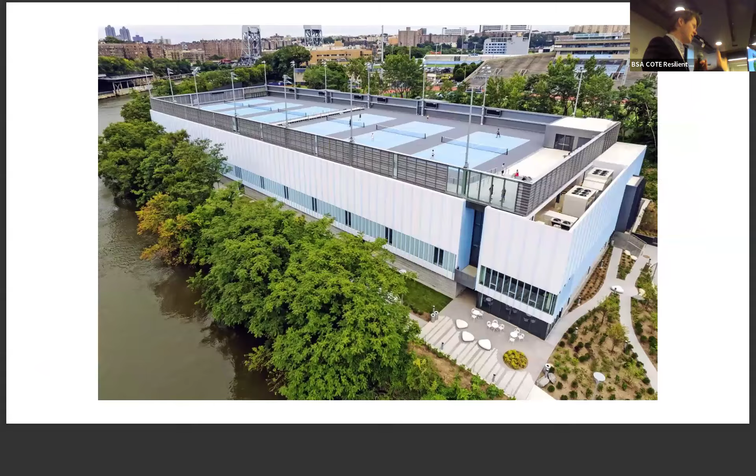And so I think that was really what led us to achieving those goals that we set out from the very beginning. And we kind of measure ourselves against those. And yes, it had to be an athletic facility. It had to have 6 indoor courts. It had to have 6 outdoor courts. But it also really had to connect with that place.

And so letting the water in allowed us to not have to turn our backs on that place. And that informed all of the design decisions throughout. And I wish I could tell you more about the facade and the roof, but that's for another time. The air and light pieces.

Okay, so we're gonna go right into our next, right? Yeah, and I'm gonna use one of these mics because they sound way better. Okay. All right, so Jacob and I have been teaching for a number of years. It's like very small on the screen. How did that happen? I don't know. Yeah, do it again. See if it'll... No, it won't do that. I think you click. Yeah, there you go. Good. Much better. Okay.

Yeah, much better. Okay, so I mentioned that after Sandy, I kind of pivoted towards teaching about resilient design and have been teaching this course for a number of years. This semester that we're going to talk about today, we aligned with the COTE Top 10 competition that the ACSA and AIA organize. And we're going to share just a little intro about that, and then you're going to hear plenty more from our students who won the competition.

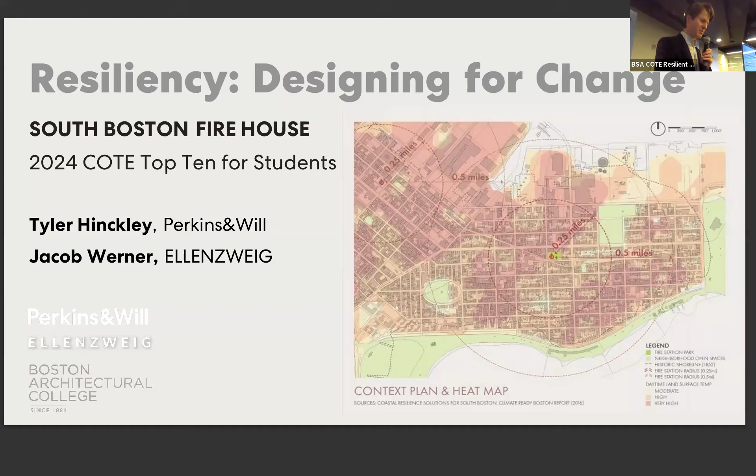Okay, I mentioned the kind of history of this course. We've used various different sites and topics. We've relied heavily on the Climate Ready Boston planning that we talked about earlier. Many of our studios are located in Boston. We teach at the BAC, and it's great to have a local site. And so we reference a lot of those standards, those guidelines, and South Boston, East Boston, Fort Point, all over. And so it's been a great progression.

We've also had collaborations with the Amsterdam Academy of Architecture in Amsterdam, as well as talked about different locations around the globe. But today we're going to talk about South Boston. Okay, you're going to talk about the competition.

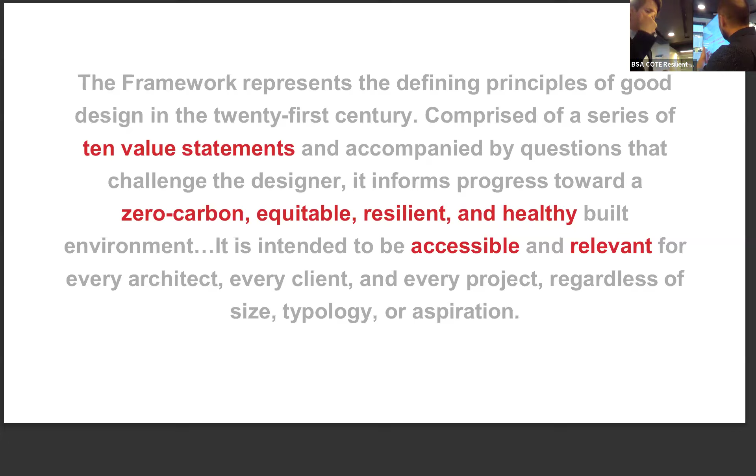Yeah, so the competition for this semester was based on the AIA COTE Top 10 for students, which is in its 10th year of running. And at this time, a few years ago, the Top 10 for students competition is more of an open competition, so it doesn't have a defined program or a defined site. Instead, it has a really structured framework based on the framework for design excellence and its 10 points, which includes a whole bunch of the things that we care about in this presentation, like zero carbon, equitability, resilience, healthy and accessible projects.

Why did it change on that screen? Oh, so the tagline: together we are designing a sustainable, healthy, and equitable world.

The really difficult part of this competition, and I'm sure the students will talk about it, is trying to fit all of the work associated with the 10 different points of the framework for design excellence in 16 weeks in a student competition project. And trying to hit and think about and integrate into the design of an otherwise very complicated fire station all of these various different elements, and find sensitive and innovative ways to do that that make their project stand out.

So to do so, we picked a site in South Boston. I'd actually conceived of this studio with another colleague the prior semester, and it didn't get to run, so we were able to pivot it to this studio. And it actually related a lot to the Climate Ready South Boston report. That other colleague of mine, Rob Adams, helped author that, and so was thinking about how a firehouse that isn't actually threatened by sea level rise still fits into the resilience approach for that whole community. And we picked an existing firehouse and its adjacent site as the program and site for the project.

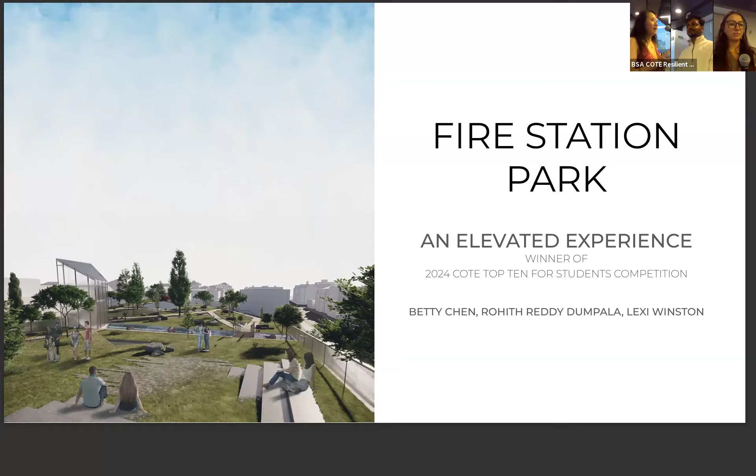So as Tyler and Jacob already mentioned, the site is in South Boston, and it is the development of a new fire station and emergency response center on the site of an existing 1930s fire station. And the footprint of the property for the purposes of our project will expand into the adjacent parking lot of a grocery store.

And we started studying the site, and as Tyler and Jacob mentioned, we went through a bunch of resources, one of them being the Climate Ready Boston report. We looked into the coastal resilience solutions for South Boston, and there were just various resources we used, and we realized this site and its surroundings have a lot of impervious surfaces. There's a significant heat island effect.

I know we're all cool in here, but today was really a great day to talk about this particular project, because very early on we started to focus on the extreme heat aspect of this site, because again, the station itself is located at one of the higher points of South Boston, so it itself isn't in a flood area even when you project it way into 2070. It's not threatened, which makes it a really good spot for an emergency response center, so other people could come here in the event of an emergency.

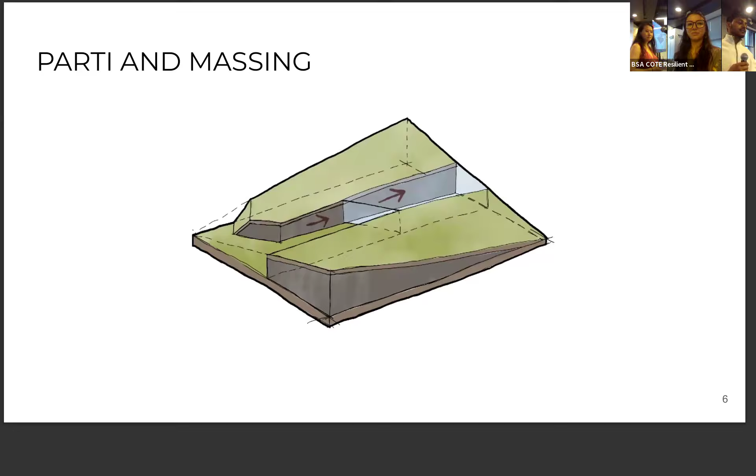We didn't want the fire station to be just a closed civic building. We wanted the site itself to act as a public infrastructure. So the landscape elevates to a park and creates a civic surface on an operational fire station. The massing then carves to allow daylighting, circulation, and programs to pass through it. The result is the building not just placed on the site, but shaped as part of the terrain.

So the program consists of a firefighting apparatus, firefighter and living area, the department admin area, training pool, and a community center with multi-purpose spaces. The apparatus and pool will require the largest areas with the highest ceilings, so they're positioned at the two ends of the building.

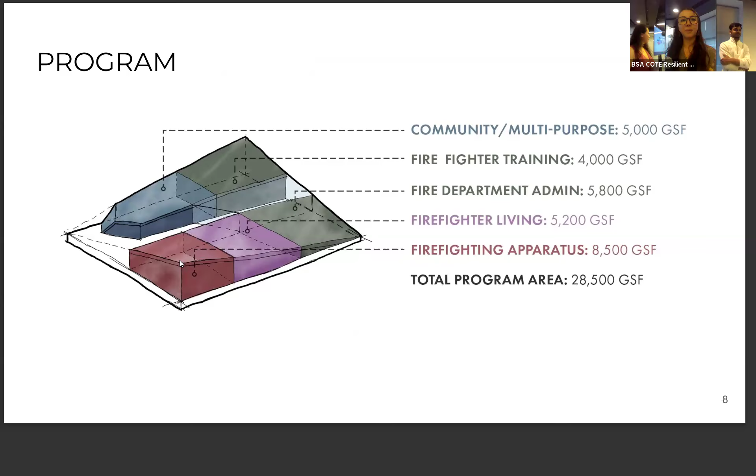And of course, while we were doing this project, we knew we were going to enter into the COTE Top 10 competition. So this whole time we were studying the AIA framework for design excellence. And we really wanted to look at how we can integrate all of the 10 criteria and not just look at them individually, because that really is the way to do it. But at the same time, we knew that there were going to be certain aspects that we focus on.

So even though this site isn't in the flood zone, water is still a very important component. City of Boston Fire Department actually has a high water vehicle and high water training program, so they respond to flood emergencies. And so in the apparatus here, this is where some of the high water vehicles can be housed, and then the pool can act as a high water training facility for the firefighters from all over Boston who can come here for the training.

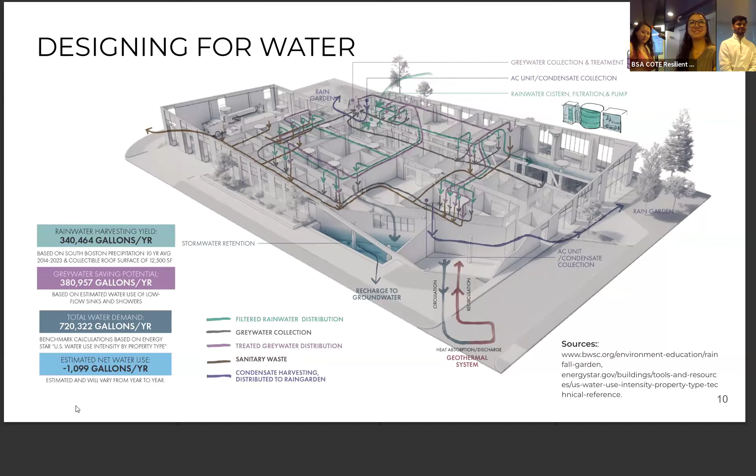But again, throughout this, we reviewed a lot of data from Boston Water and Sewer, and we looked at benchmarking, and we wanted to make sure we present this as a realistic solution where it can be sustained on its own with regards to water.

So the existing site consists of mostly impervious surfaces, and a rooftop park and increased green space will bring carbon sequestering opportunities, improve air quality, and decrease land surface temperature in the area. And it also promotes increased biodiversity and incorporates indigenous, non-invasive vegetation tolerant of varying conditions so that there'll be less need for watering and maintenance as well.

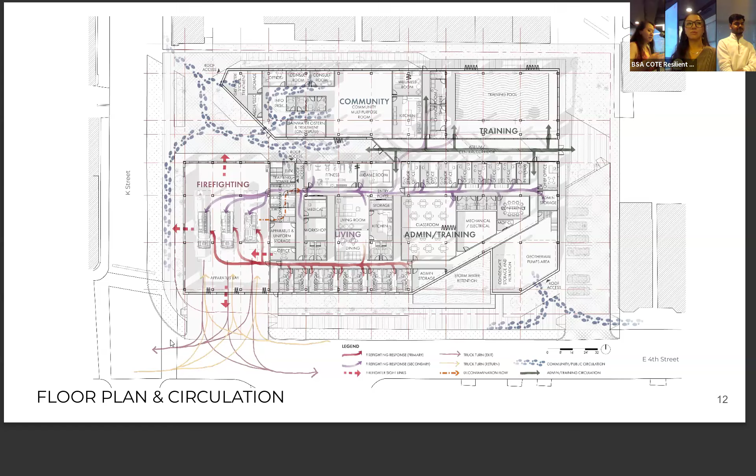And so we wanted to ensure that the apparatus had good sight lines. It is on the corner of the lot. And then there are some fire stations, and some of our colleagues designed a pull-through where it goes in one side and out the other. But again, we have a constraint in terms of sight. So we ended up just having the garage doors from one side, which meant we had to do a bunch of studies for truck turning to make sure they can actually get in there.

The apparatus bay is designed to be a functional, durable, and expressive space. The timber structure gives warmth to the highly technical program while maintaining clear spans and efficient movement for the emergency vehicles. In contrast, the firefighters' bedroom focuses more on recovery and well-being; daylighting, natural materials, and a quieter scale bring a restorative environment for people working under stressful conditions.

The exterior of the building is clad in shou sugi ban siding, which is wood treated with intense heat that burns off the cellulose in the wood, creating a protective soot layer, making it resistant to water, fire, UV, fungi, and pests. It's low maintenance, durable, cost effective, and symbolically representative of the fire station. Glulam and CLT allowed us to reduce embodied carbon while expressing the space honestly.

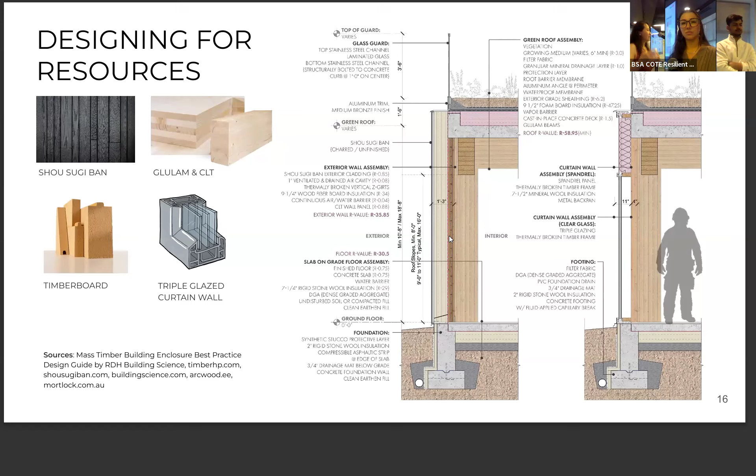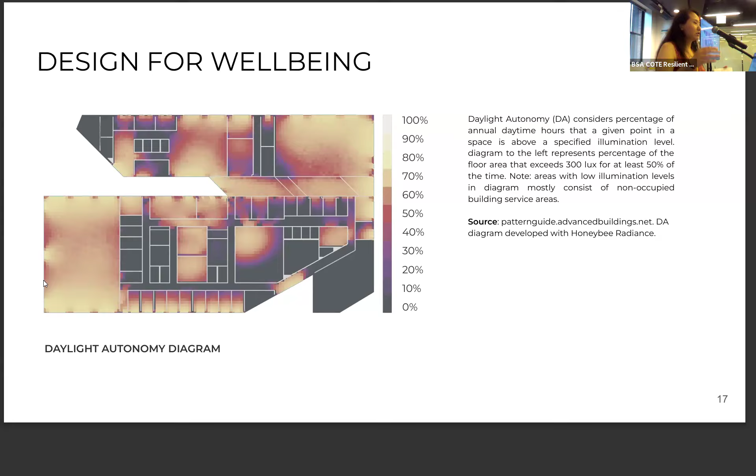Yeah, and one other note on well-being I forgot to mention earlier: in the floor plan, the way that we designed the spaces and the sequence of the rooms were also based on ensuring that there's a decontamination flow when the firefighters get back from responding to an emergency. In our research, we found out that firefighters are exposed to a lot of toxins and carcinogenic materials. That's really not good for them, and a lot of existing firehouses are not designed to ensure their health and safety in that aspect. So that was a really high point to focus on, to make sure the firefighters are as healthy as they can be.

And so, yeah, we wanted to target net zero operational carbon. We used a baseline of 55.6 kBTU, but we were going for a 55% reduction. That was our target EUI, and so through the high performance envelopes, we're using solar heat capture, daylighting, natural shading, and we want to include this efficient hydronic system.

Our energy sources are mostly coming from the geothermal and on-site solar, and throughout this project we learned a lot of new tools. For instance, we used the Zero tool. We looked into solar panels and how they work, how efficient they are and how much energy we can actually capture, which was actually not a lot. So we had to rely a lot more on the geothermal system. It was a real goal for us to not only have a concept, but a proof that this could actually work, as long as you have a lot of money.

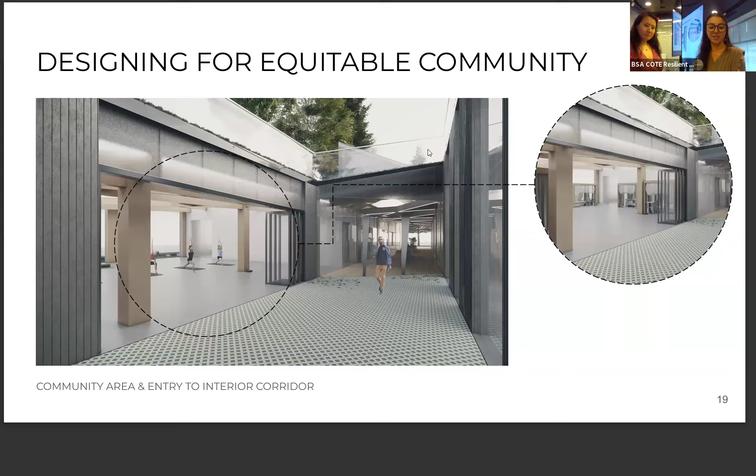The modern fire station combined with the community center could provide safety, security, and protection, which allows the firefighters to serve the community better. And a new community center aims to promote equitable access to community services and cultural engagements. The elevated park, accessible by stairs, ramps, and an elevator, supports improved air quality and grants the community new space for wellness and socializing. Community center and water treatment area are visible learning spaces. We want sustainability to be a part of public experience.

Oh, and we actually did speak to some firefighters throughout this process, and I learned that a lot of firehouses already host tours for kids and students. So this really helps to expand that. They're already doing it. Might as well have all these showcases of how our water filtration system and these things actually work, so that they can not only learn about firefighting, but also get inspired for sustainability and resilient design.

Going back to the beginning, our objective was really to serve the community, for this to be a community destination, as well as showcase the critical work of the firefighters. Again, parks: we really wanted to make sure that we have a lot of green spaces in here. Studying urban parks and walking around, we noticed that existing parks are nice environments to escape from the hot and busy urban areas, but they're not always integrated with the neighborhood or with the buildings. So why don't we do that? That was essentially our overall concept.

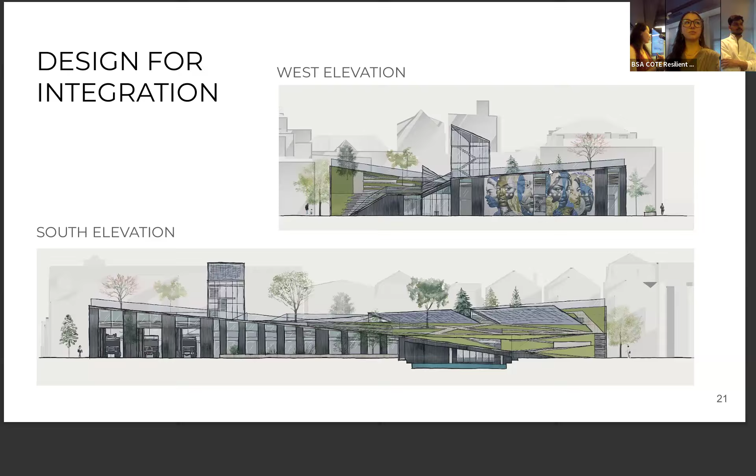Even though this was a project about sustainability and following this framework for resilience, that wasn't actually our ultimate goal. It was really about serving the community, and ensuring health and safety, not just for people that work there, but also for everyone that comes here. And ultimately that is the goal of the framework, to make sure we all live in a comfortable environment. So in the end we decided to create a place where people can come enjoy tranquil and cool green spaces, recreational spaces, and have it really be a holistically integrated park within the building and the neighborhood. Thank you.

To stay up here? Oh, us or everybody? Yeah, I'm going to invite all the speakers to come on up. And oh, these guys provided an appendix. Look at that. Oh, sorry. Yeah, we had so much we couldn't include. There's a lot of extra. Amy, can I add something?

Did I mention that they won? It was an international design competition, I'm sure most of you are familiar with it, over 1,000 participants and over 600 entrants. There are 10 winners, and they were one of them. So proud. Kudos to you. Thank you.